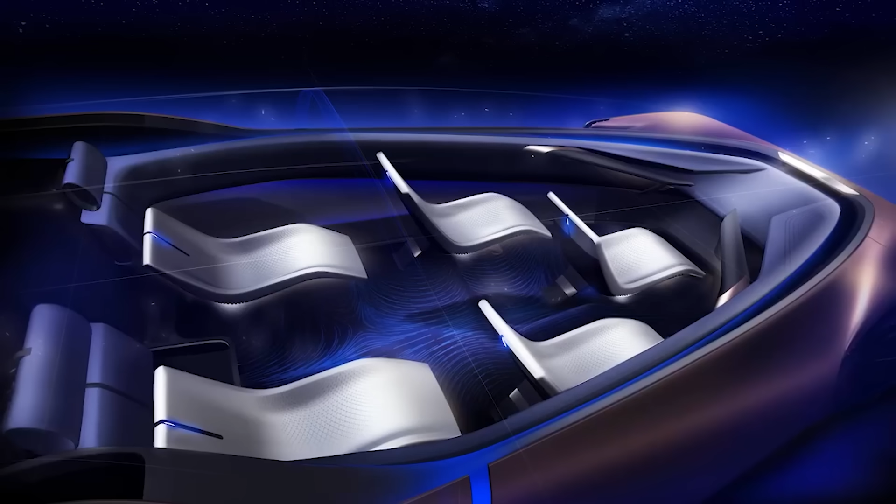Next up is a fully autonomous concept car. The developers are so confident in its self-driving capability that they didn't include a steering wheel at all. Instead, compact joysticks are installed on each side, but they're only needed in case of emergency. The extra space in the cabin has been used for additional seats that recline.

There are no digital displays inside. Instead, the car features projectors with augmented reality technology. Of course, this vehicle, by the Italian studio Pininfarina, is electric and has every chance of becoming the ideal car of the future.

Residents of Texas and North Carolina are in for a treat, as their food can now be delivered to their doorsteps within just 5 minutes, thanks to Flytrex. This marks the first time such a delivery service has been specifically designed for suburban areas. The round-trip journey spans roughly 8 kilometers.

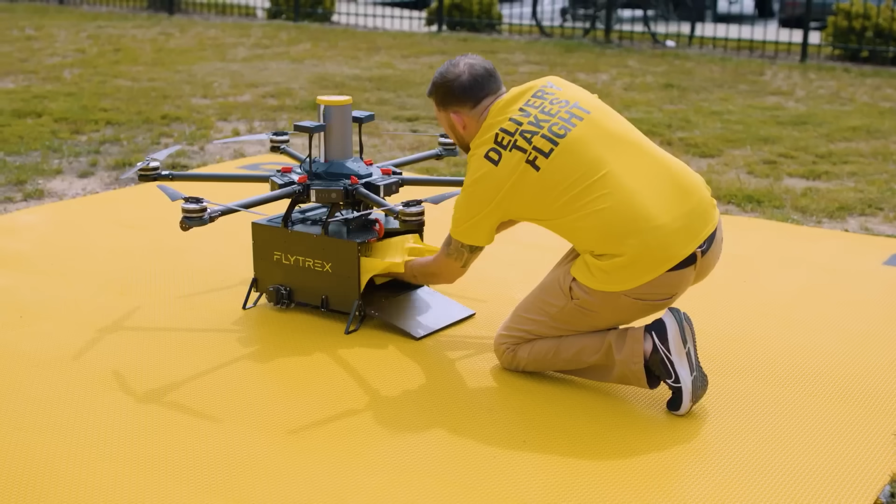These drones can reach speeds of up to 51 kilometers per hour, ensuring your coffee stays hot and your ice cream remains frozen. No pilots are needed, but a team of operators closely monitors the flights as a precaution. Currently, the maximum weight for orders is 2.5 kilograms. If you're not in the mood for lunch, you can also stock up on essentials like toilet paper and more.

Relatively small changes in motorcycle design can significantly enhance comfort and safety. The Rungu Dualie, a motorcycle developed in the United States, features an extra front wheel that improves stability, making it harder to fall off. The developers also extended the wheelbase, which increases cross-handling performance. Compared to competitors, the Rungu Dualie can handle slopes that are twice as steep and easily travel through muddy or snowy terrain.

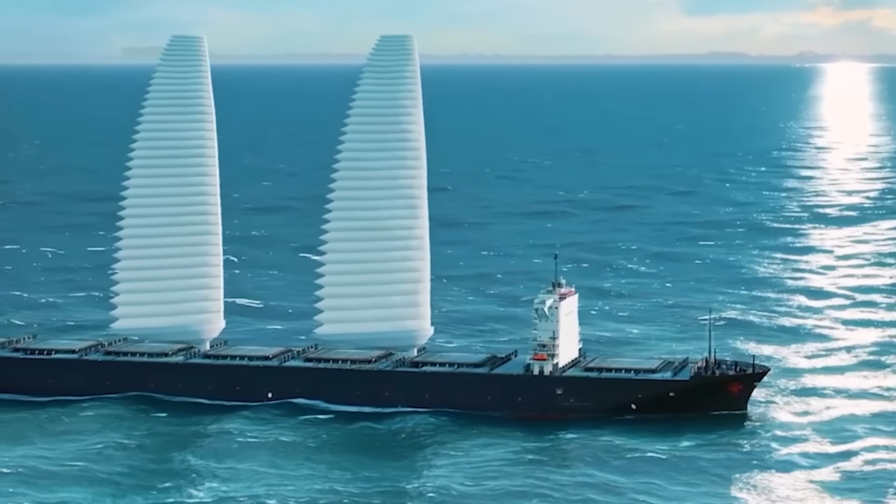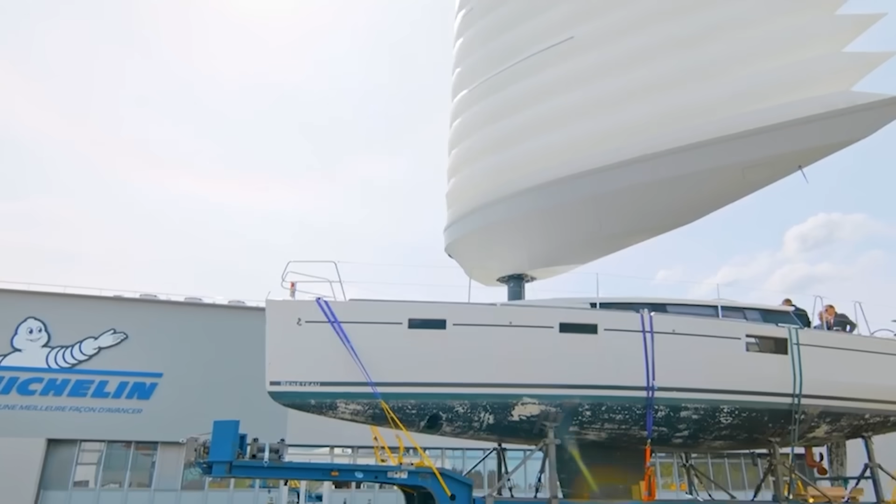The next development will partially address the environmental challenges humanity has been dealing with in recent years. Michelin's WISAMO is an automated telescopic inflatable sail system. It can be fitted to a newly built ship or installed on an older one already in operation. The massive sails move the ship forward using the power of the wind, an unlimited and completely free energy source. This reduces fuel consumption and lowers emissions.

Another major benefit is that, thanks to its specialized design, WISAMO can be used on larger ships that are typically less environmentally friendly. These include different roll-on/roll-off vessels, bulk carriers, and oil tankers.

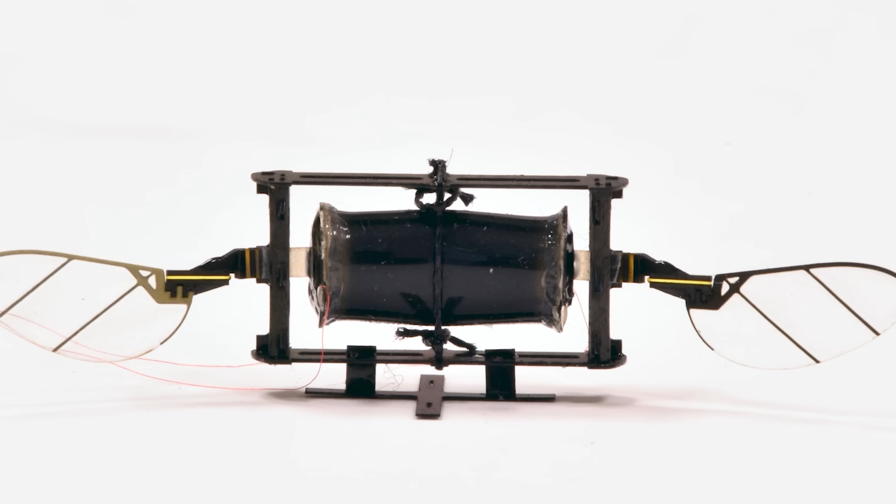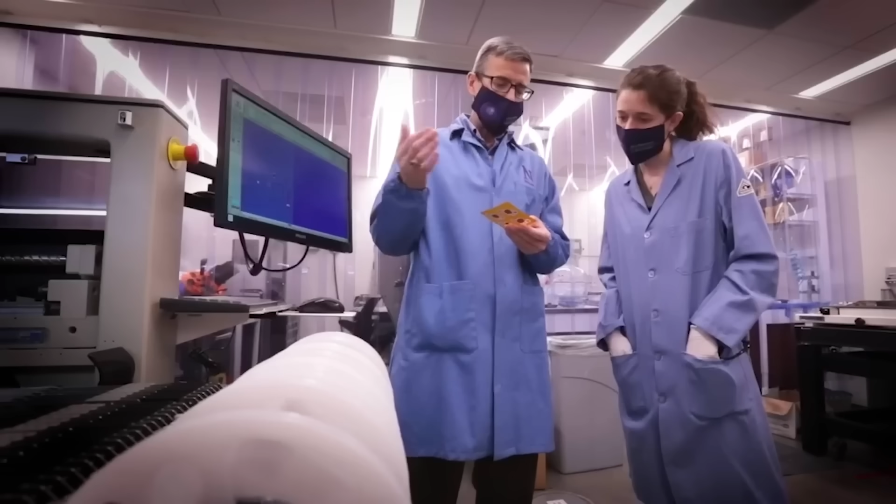Meet the world's tiniest remote-controlled robot. It's incredibly small, resembling a crab that's only the size of a ballpoint pen tip. Measuring under 0.5 millimeters in length, this mini robot can twist, bend, crawl, and even jump. Designed with surgical applications in mind, it can assist in procedures like tumor removal or clearing blocked arteries.

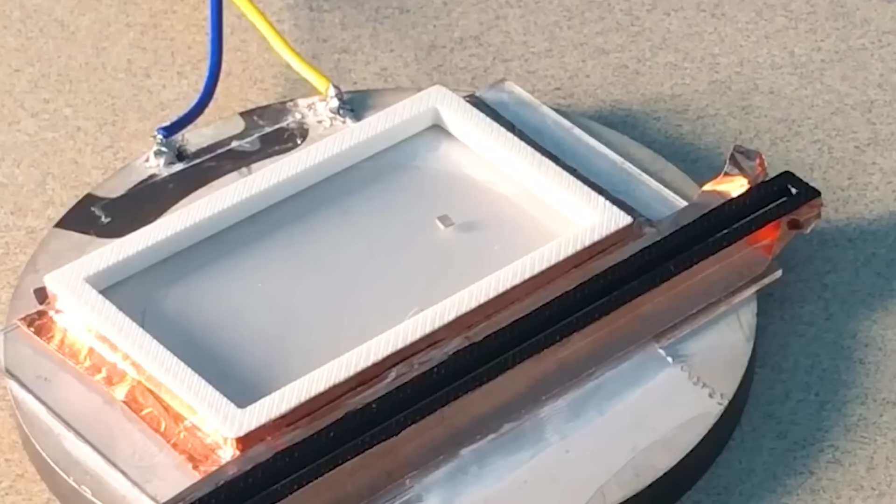These electric insects are made from shape memory alloys and are controlled by lasers. There's also another groundbreaking technology in the miniature robot space: ant-like robots that move via vibrations produced by ultrasound. Their legs are fitted with sensitive bristles that detect sound waves, allowing them to move independently or in groups. Like their crab-shaped counterpart, these ant-inspired robots have significant potential in the field of medicine.

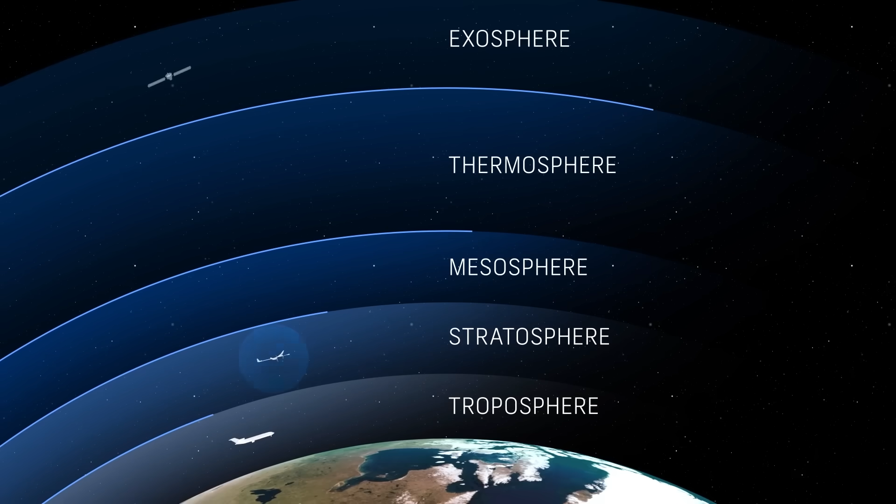In June of last year, experts successfully tested the PHASA-35 at an altitude exceeding 20 kilometers. This drone serves as a cost-effective alternative to satellites and runs on solar energy. It's claimed that the PHASA-35 can stay airborne for a whole year with a payload capacity of 15 kilograms. It can handle various tasks, from setting up 5G networks to monitoring forest fires. Its impressive 35-meter wingspan adds to its capabilities, and it can reach speeds of about 145 kilometers per hour. Keep an eye out for it hitting the market in around 3 years.

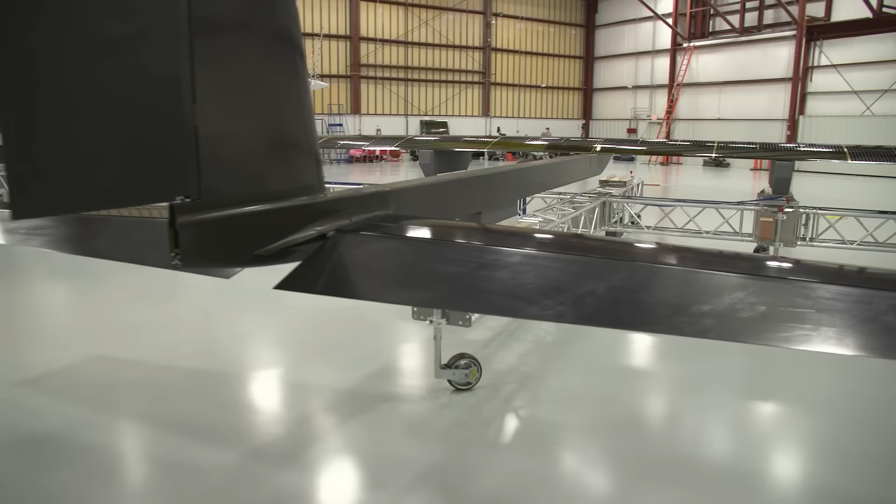HausBots' HB1. All high-rise work comes with risks, but in the future this will no longer be an issue. Several companies are already working on robots that can climb walls. One example is HB1 from the British company HausBots. It is a flat, four-wheeled device with unique patented motion technology.

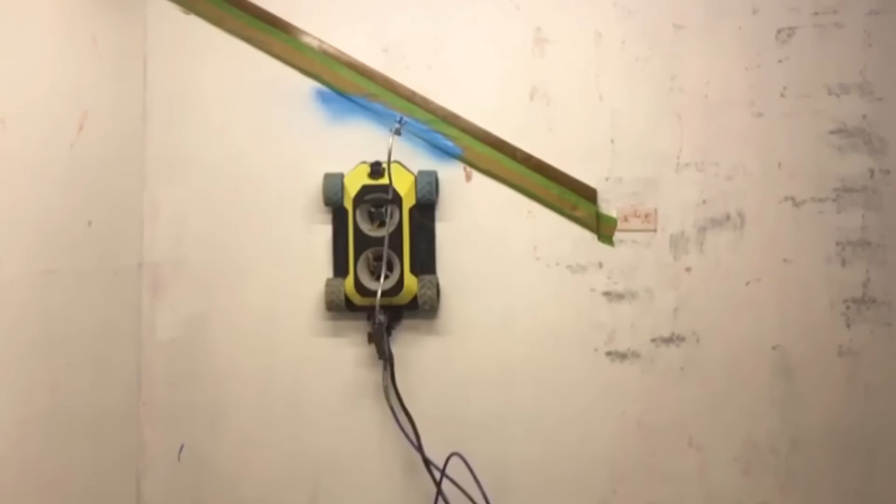It climbs vertical surfaces using air currents that generate 92 pounds of downward force, which is enough to support the robot's weight and an additional 13 pounds of payload. HB1 can even navigate rough surfaces and get past small obstacles like ropes and bolts. The developers anticipate the robot will be used in the future for painting work and visual inspections of buildings and infrastructure.

Have you heard of the Artemis Moon Exploration Program? The goal is to establish a settlement on the moon by 2030, and the technologies developed for Artemis will also play a crucial role in future Mars missions. One standout innovation is LUNARSABER, a structure developed by Honeybee Robotics.

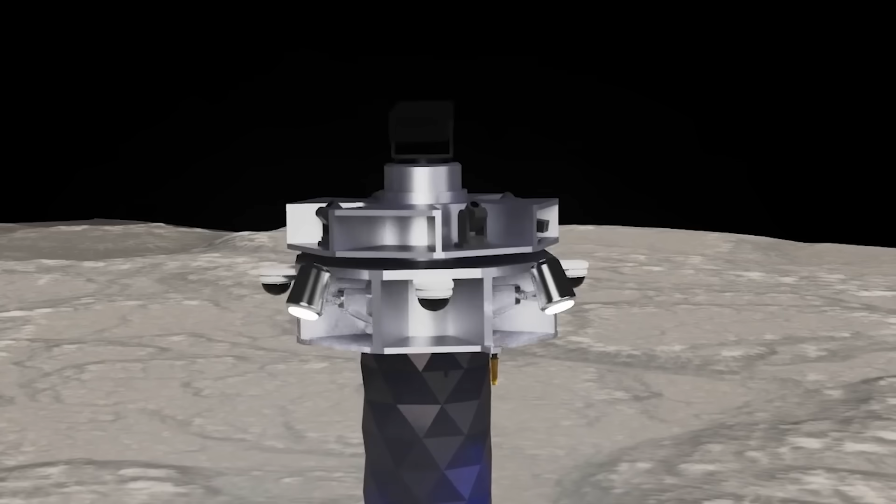LUNARSABER is a 100-meter tall tower capable of supporting up to a ton of weight. It will be outfitted with solar panels capable of generating 100 kilowatts of power. These towers will also feature adapters to recharge lunar rovers and other space equipment, essentially acting as power banks and creating a reliable energy infrastructure on the moon.

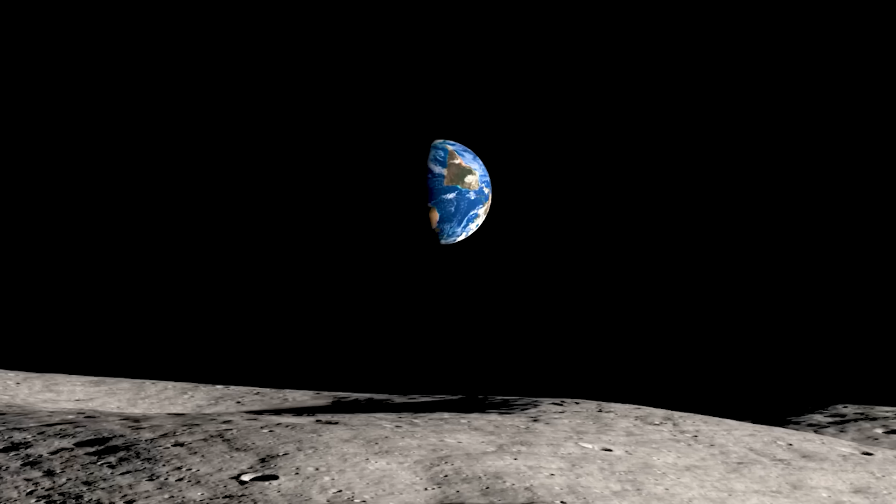With Honeybee Robotics' extensive experience working alongside NASA and the US Department of Defense, we just might see these towers in action soon.

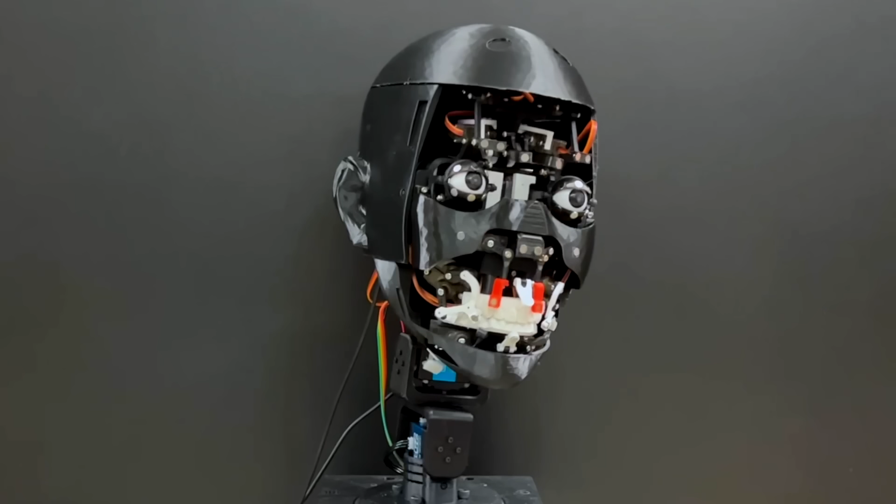In recent years, robotics has made significant progress, particularly with machines designed to interact with humans. A great example is Emo, a robot with a silicone face. Emo can make eye contact and even predict when a person is about to smile up to 840 milliseconds before it happens. While this might seem like a minor detail, it greatly enhances the relationship between humans and robots, fostering an atmosphere of trust.

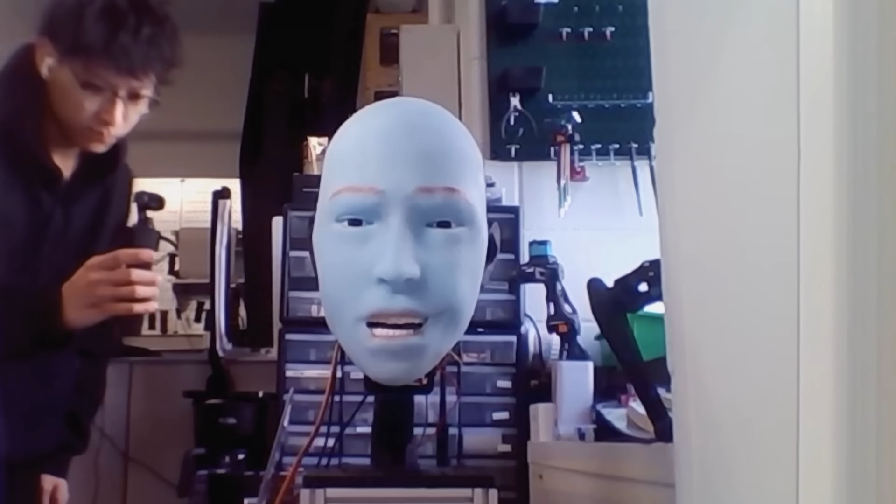Developed at Columbia University, the scientists behind the project faced two significant challenges: creating a mechanically complex and expressive face, and calculating the perfect moment to display emotions. The project was so successful that Emo, the silicone-faced robot, might soon be auditioning for acting roles in Hollywood.

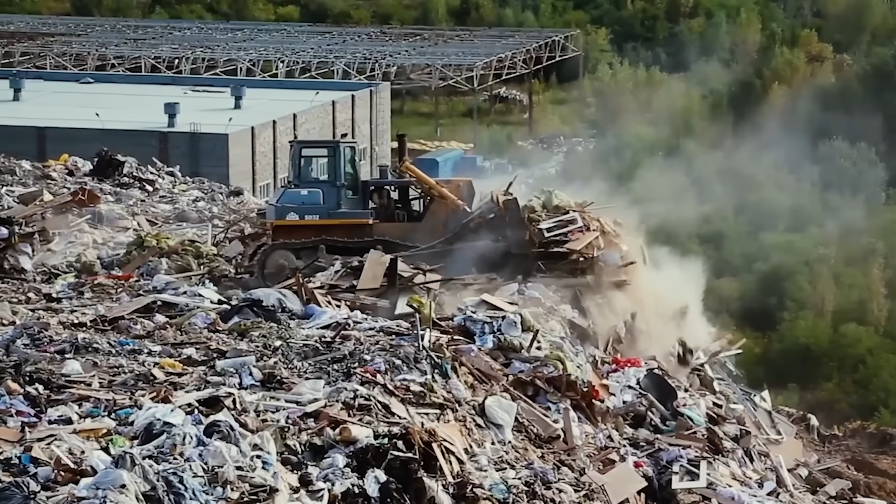Recycling is crucial for slowing the expansion of landfills. With advances in robotics and space exploration, why not have a smart trash bin? That's exactly what the Bin E team has created. Using AI, their smart bin identifies waste with impressive accuracy, misclassifying items only 8% of the time.

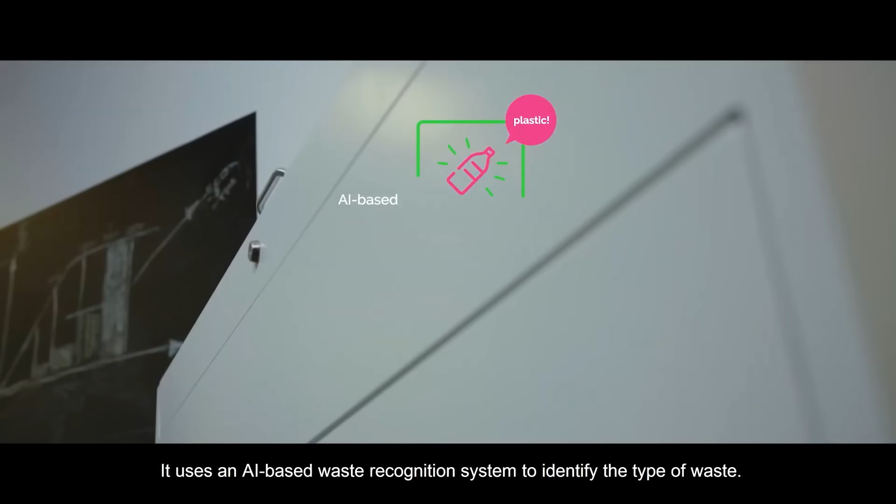It handles everything from plastic and aluminum to batteries, automatically sorting and compressing waste when possible. When the bin is full, it sends notifications to your phone or email, and the data is stored in the cloud, helping garbage trucks plan more fuel-efficient routes.

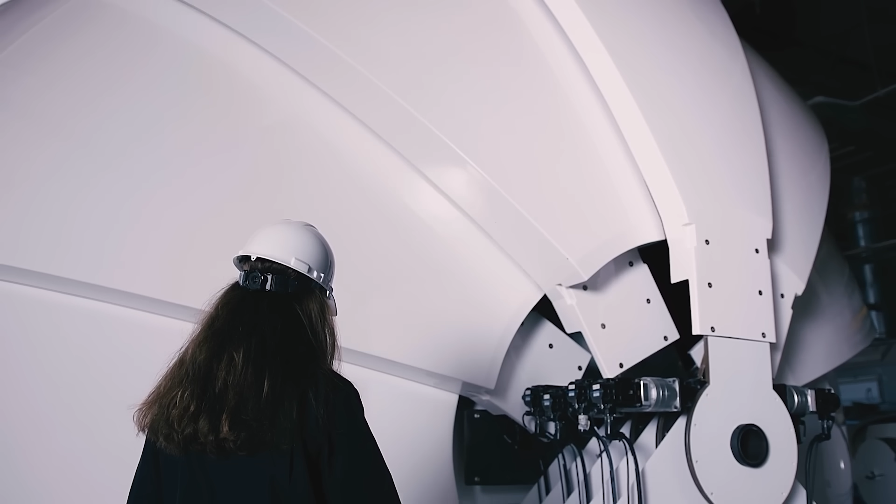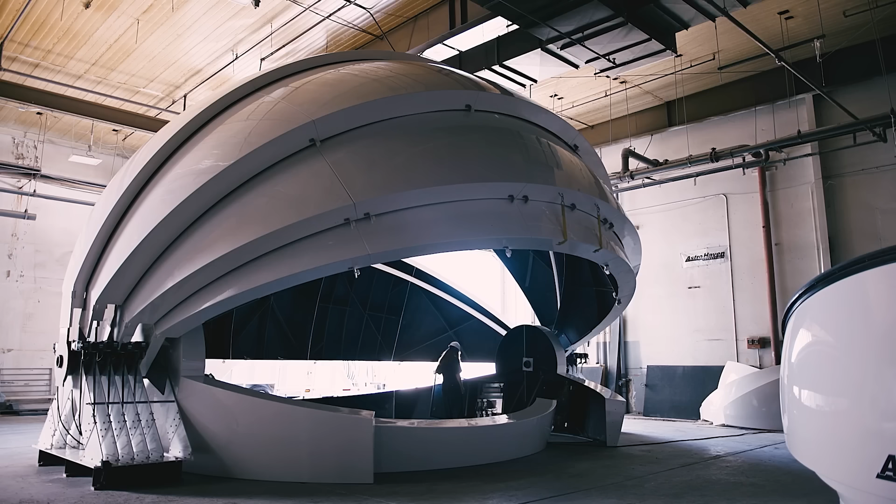In 1995, Grover Brotherston founded Astrohaven, a company focused on astronomical solutions. The 75-year-old entrepreneur had a simple vision: design and sell affordable fiberglass domes for observatories. After experimenting with a couple of rotating models, he hit on the idea of a static, clamshell-shaped structure, and it was an instant hit. Brotherston's creation became so popular that the product range expanded to include a massive 6-meter-tall model.

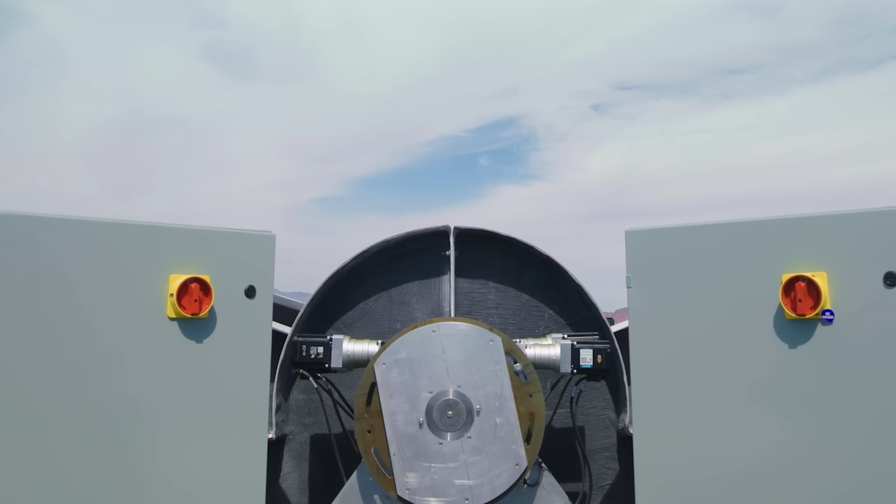It wasn't just amateur astronomers buying from Astrohaven. Defense companies also began showing interest. Today, the domes continue to evolve, integrating aerospace engineering solutions while staying true to the company's philosophy: focus on astronomy or science rather than worrying about maintaining observatories.

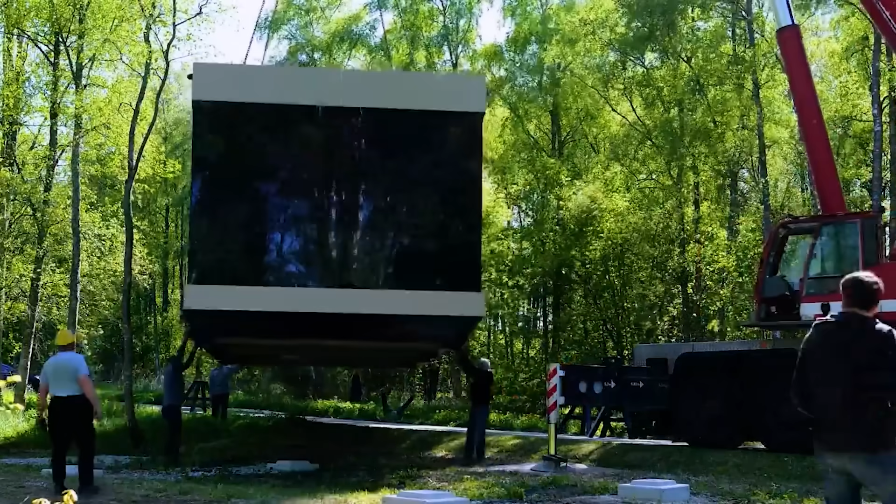The Space I/O House has reimagined the concept of modern self-sufficient homes, all thanks to the Space Project. A dwelling that offers its owner a high level of comfort while also being extremely mobile. The designers propose transporting the structure from place to place like a trailer, quickly, easily, and without effort. It can be placed almost anywhere, even in remote locations, because all the necessary systems are already built inside.

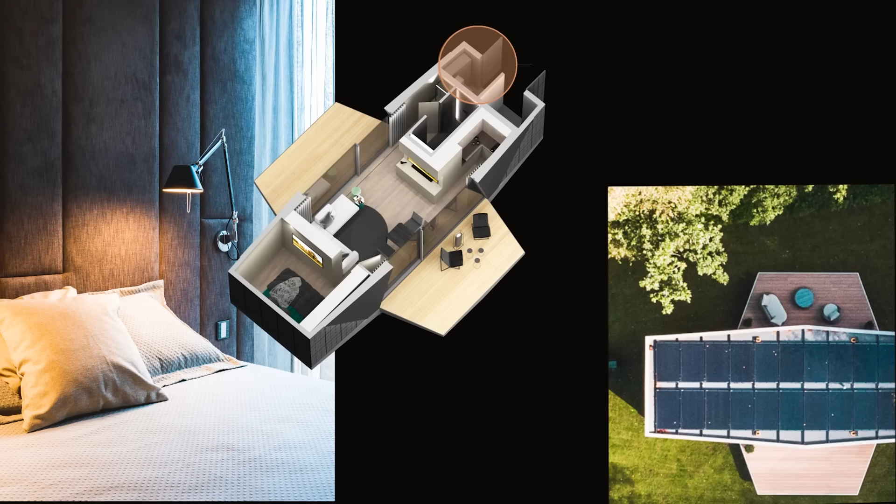The base has electricity, heating, water, sewage, and Wi-Fi. The house is built from high-quality, eco-friendly materials and is environmentally sustainable.

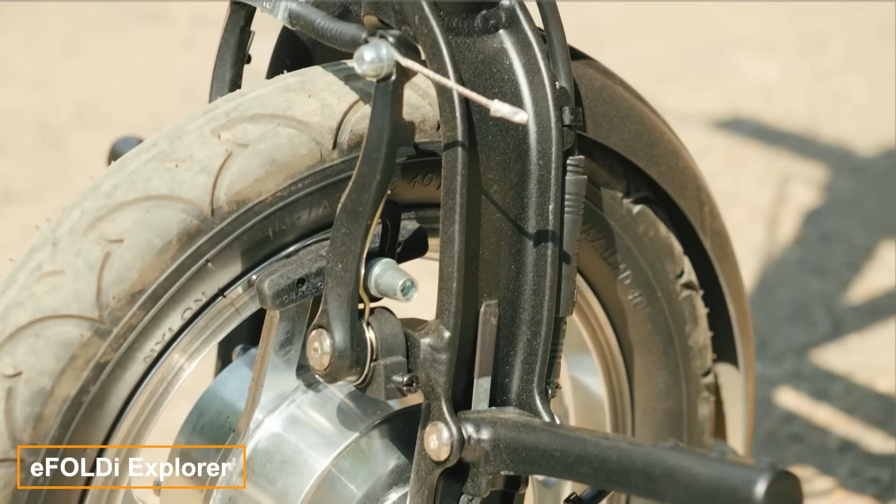The eFOLDi Explorer scooter is now available for those willing to spend $3,520. With a foldable and lightweight design, just 17 kilograms without the battery, it offers convenience that sets it apart from other electric vehicles. It's easy to carry on public transport, store in a car trunk, and even doubles as a chair. Though not the fastest vehicle, with a top speed of 13 kilometers per hour, it has a 23-kilometer range on a full charge.

According to the manufacturer, this range should provide a new sense of freedom for users. Plus, pneumatic tires and 4-point seat suspension ensure a smooth, comfortable ride.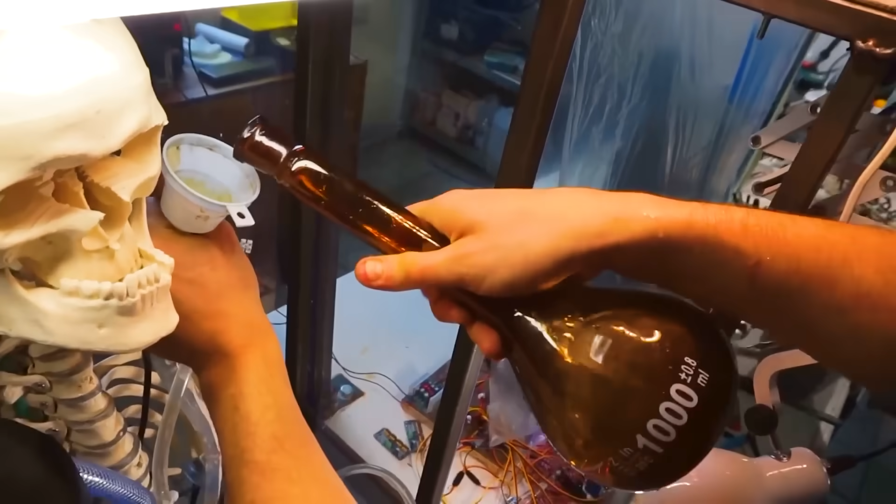A special hydraulic system made up of airtight tubes is responsible for how the artificial muscles work. The controlled movement of fluids inside makes the hand contract and relax, causing motion.

A few months ago, the inventors showed that even though it weighs 2.2 pounds, the robotic arm can lift 15.6-pound dumbbells. However, engineers still need to improve the arms by adding muscles and eliminating movement restrictions for the wrist and fingers.

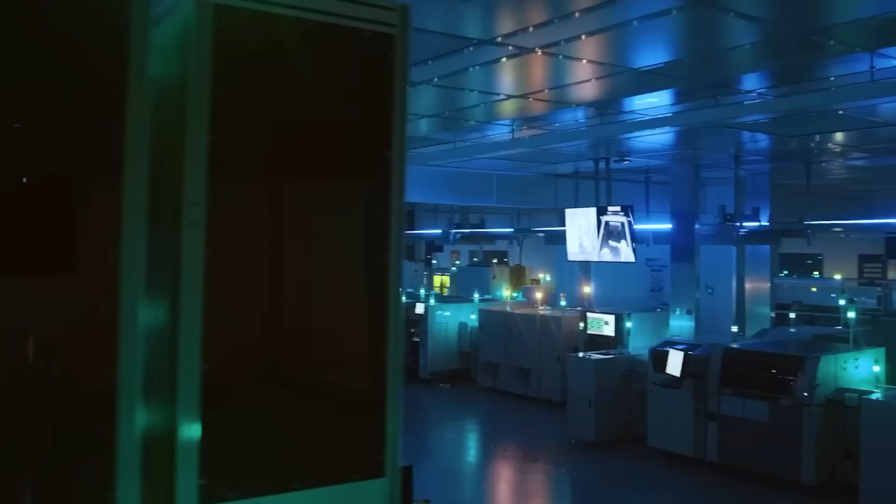Xiaomi has ambitious plans with its smart factory. The Chinese tech giant aims to revolutionize high-tech manufacturing by automating the entire process.

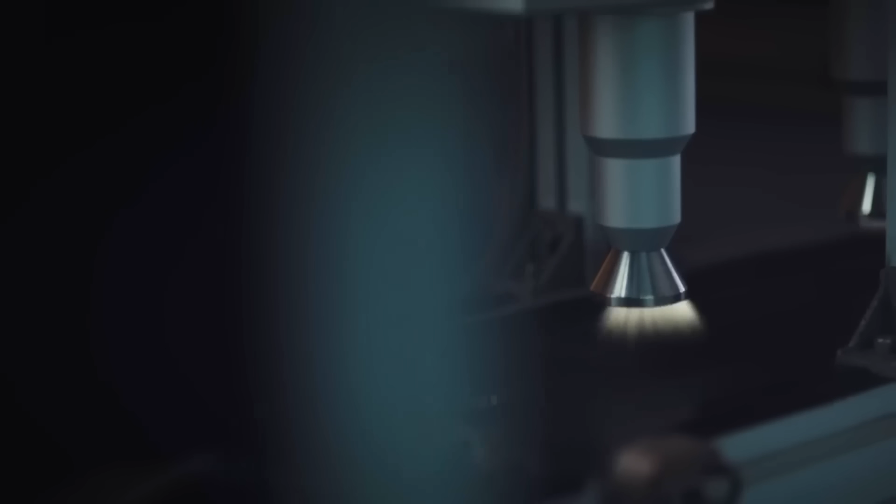They've already opened two factories where robots assemble cell phones without human assistance. The Changping Smart Factory boasts the capacity to produce over 10 million devices annually, a huge leap compared to the previous facility's output of just 1 million.

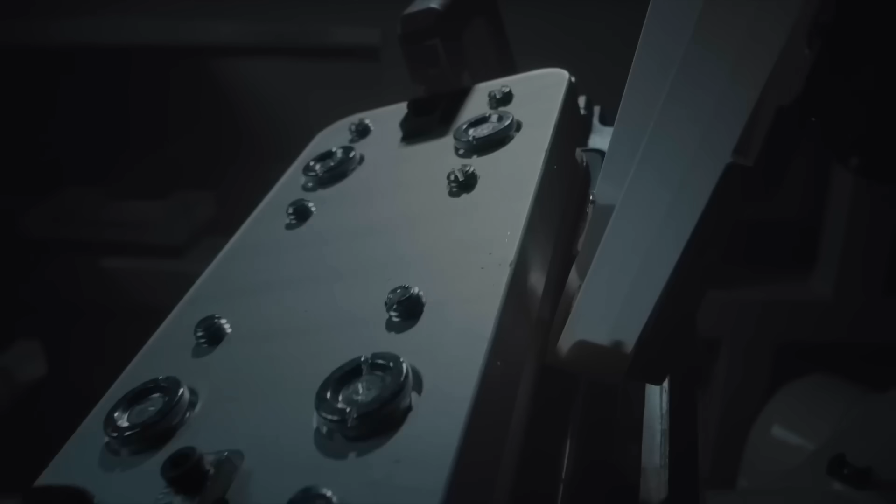Notably, all the equipment inside the factory is also made by Xiaomi. The robots there build Xiaomi's 14, 14 Pro, and 14 Ultra flagship models, with testing areas also fully automated.

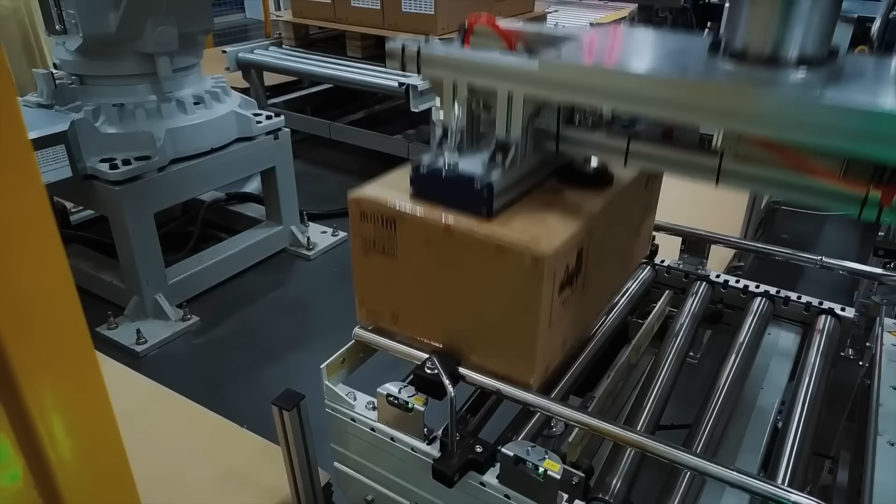It's clear Xiaomi is pushing the boundaries, and it'll be interesting to see how competitors like Samsung, Apple, and Huawei respond.

In 2018, this drone set the record for the longest uninterrupted flight, staying in the air for an incredible 25 days, 23 hours, and 57 minutes.

This was made possible by its unique design. First, the vehicle's entire upper surface is covered with solar panels that generate energy to power the systems. Second, the Zephyr S flies in the stratosphere at an altitude of 13 miles, meaning it isn't affected by weather conditions.

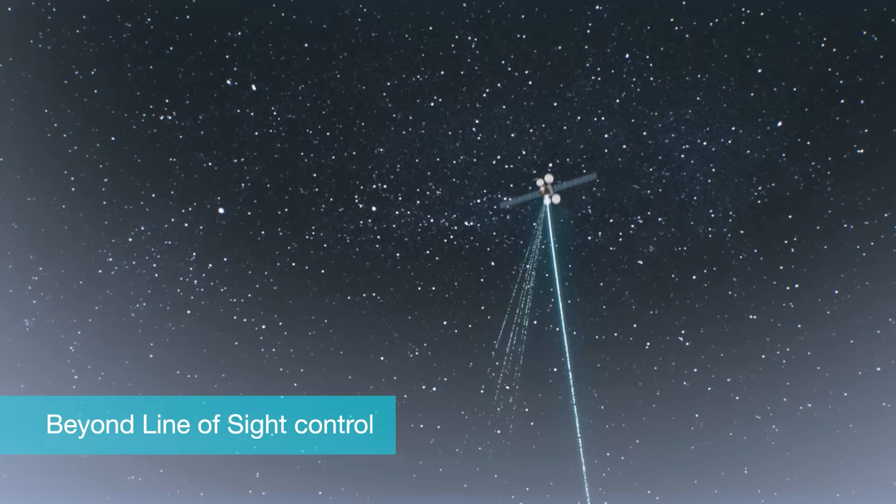Zephyr S has a wingspan of 82 feet, a weight of 165 pounds, and can carry 5 times its own weight. It is perfect for reconnaissance, surveillance, and as a cost-effective alternative to communication satellites.

The United Kingdom has already placed an order for several of these drones for military use.

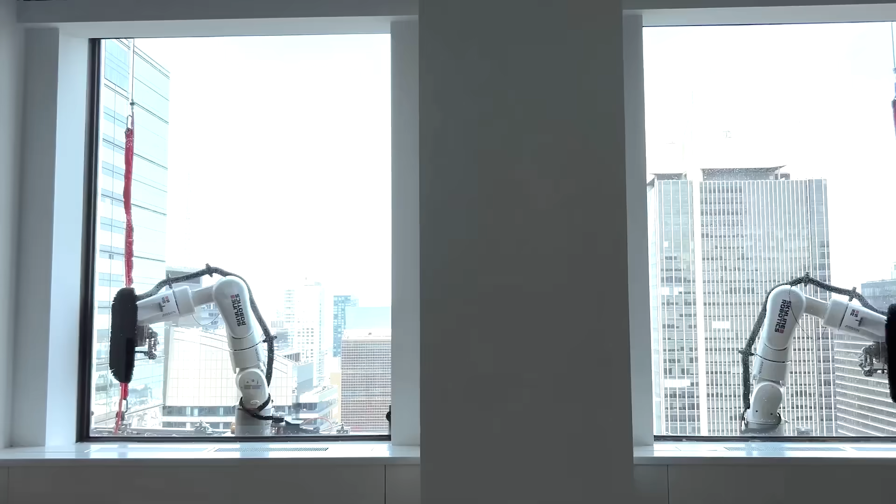In 2010, there were only 52 skyscrapers worldwide, but by 2020, that number had risen to 198. Maintaining these towering giants presents unique challenges. Even cleaning windows at such heights becomes a daunting task.

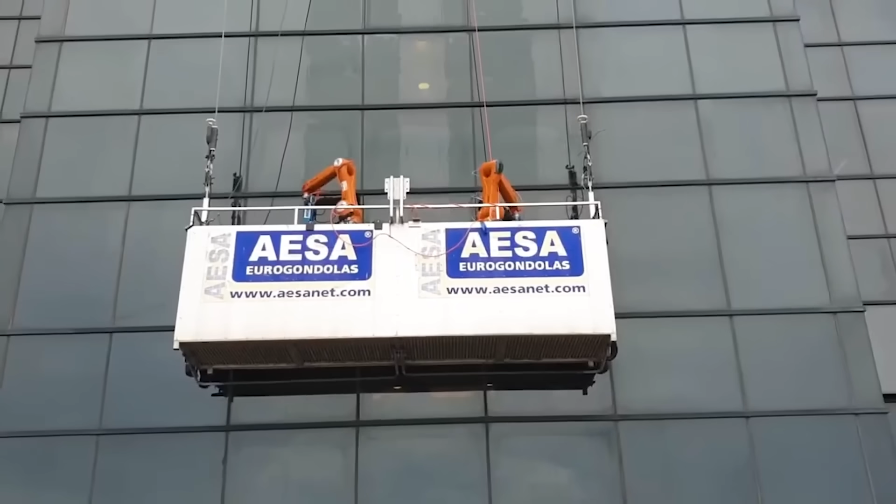Luckily, the Ozmo robotic system is up to the challenge. Ozmo's agile robotic arms clean windows 3 times faster than humans while applying just the right amount of pressure, thanks to integrated sensors. It's also weather-resistant.

Wind gusts are no issue, as Ozmo recalculates its cleaning path hundreds of times per second, always selecting the optimal route.

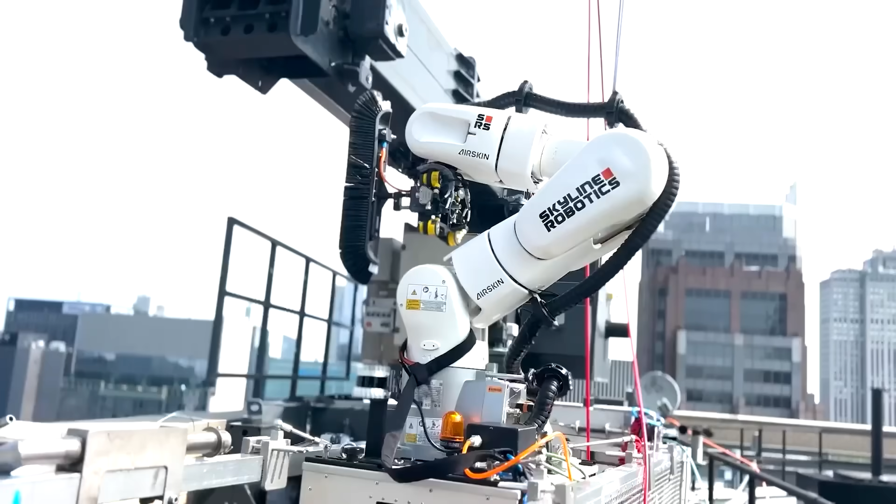Motorcyclists are among the most vulnerable road users and face the greatest risk when taking sharp turns. The Swiss company Aegis Rider AG has created a solution to this issue and already has a fully working prototype.

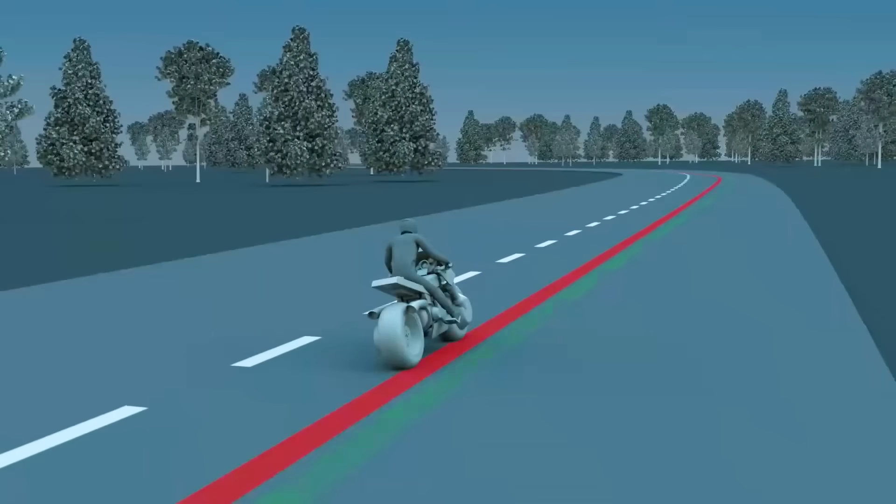The safety system includes a set of sensors, a camera, a satellite navigator, an IMU, and a computer. It assesses the road conditions and then informs the rider how to take the turn in the safest way. The motorcyclist gets this information through augmented reality.

The system projects the best path to take directly onto the road ahead of them. Furthermore, if the rider makes a mistake, it tells them how much they need to adjust their speed and the bike's angle.

Let's go to Texas and check out ISEE's accomplishment. Thanks to their efforts, this distribution center, spanning around 160,000 square meters, has become the world's first with a fleet of entirely autonomous trucks.

These trucks efficiently handle 750 trailer sites, employing artificial intelligence algorithms to drive in a manner that cuts costs and enhances safety.

Note that the transportation and warehousing sector tops the list for employee injuries, according to the U.S. National Safety Council. Given the expected shortage of 160,000 truck drivers in the States by the decade's end, ISEE's solution proves to be a crucial investment.

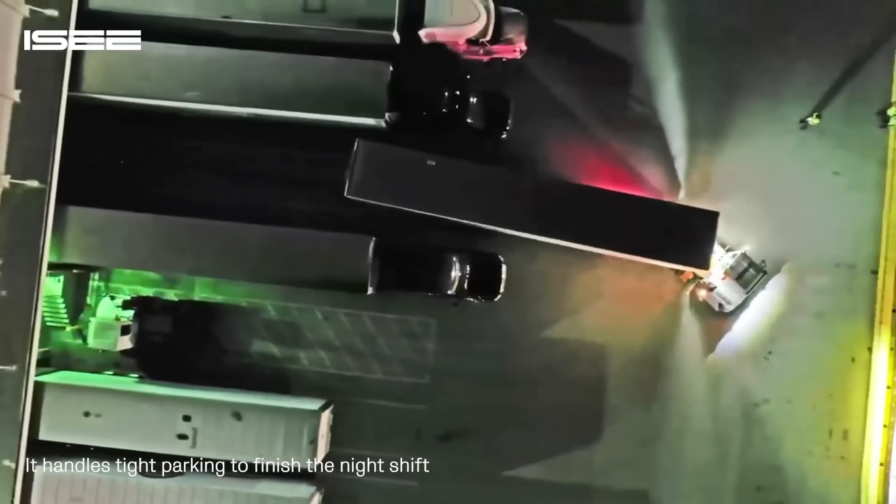This is the first personal yacht powered entirely by renewable energy sources. Its propulsion system is hybrid.

Solar panels on the roof generate part of the energy, while the rest comes from hydrogen fuel cells that don't even need to be refueled. Green hydrogen is produced right on board through electrolysis, using solar energy and salt water.

As a result, Aquon 1 essentially has an unlimited range and can stay at sea indefinitely. The yacht's interior is designed to match the luxury of a high-end hotel, ensuring you won't want to return to dry land.

The creators of the iFeel suit believe it represents the next big step in continuous health monitoring. They're working on two primary applications.

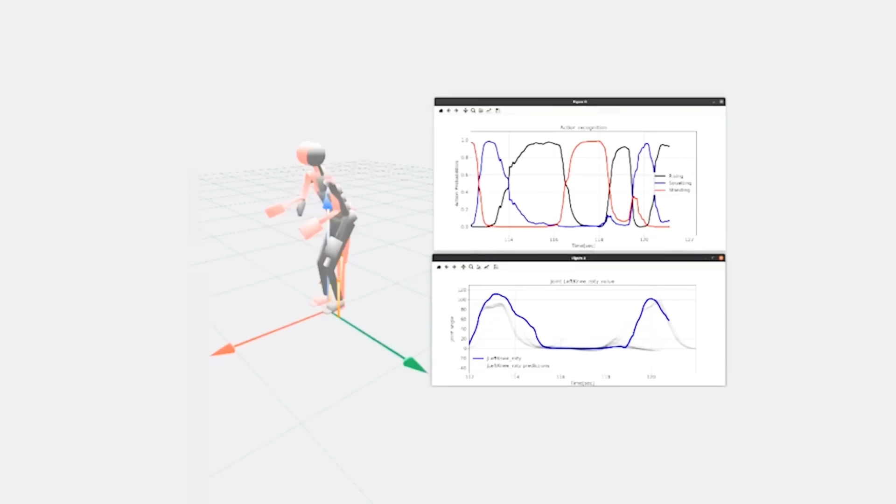First, the suit is geared toward rehabilitation. Equipped with various sensors, including biometric ones, it gathers critical data for physicians, for instance. It can predict fatigue levels.

Second, the suit plays an important role in prevention. It tracks posture and delivers tactile feedback if the user isn't standing or sitting properly.

Additionally, the iFeel suit can control the humanoid robot iCub 3. Who knows what other possibilities the developers will unlock?

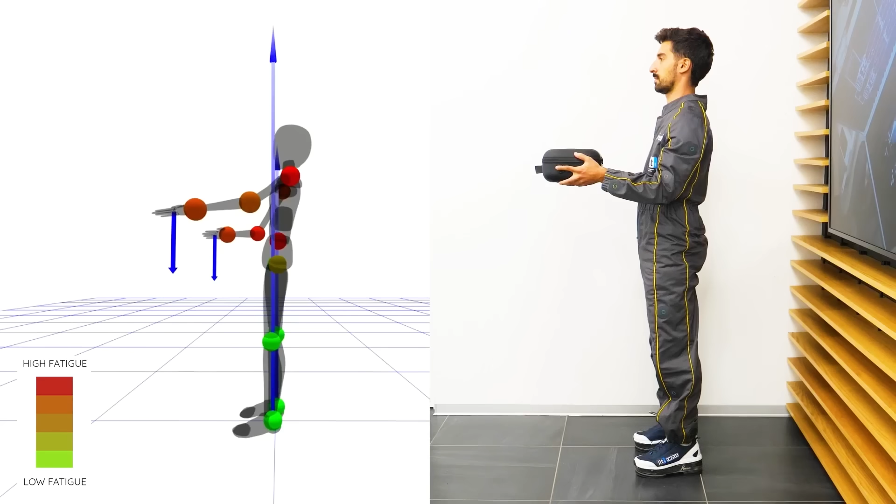The US-based company Quell Tech has developed a technology that will revolutionize boxing training, turning the exhausting process into a fun game that boosts the athlete's efficiency and performance, all without leaving the house.

The system includes a game played on a screen, controllers, and a special console worn on the body. The game mode makes you feel as if you were in a real fight, while the console adds resistance, forcing the user to exert more effort.

Another advantage is that during training, the system tracks key indicators such as speed, strike accuracy, and frequency, allowing for better analysis and progress tracking. Quell can be yours for $250.

In 2021, the South African startup Fractal introduced a prototype of a flying vehicle designed to mimic the appearance of a bat. Experts hope that this vehicle will help solve Africa's severe transportation challenges in the future.

Macrobat runs on a 100% environmentally friendly propulsion system and is capable of vertical takeoff and landing. It's too early to discuss precise specifications as no test flight has been scheduled yet.

However, the planned Macrobat will have a range of 93 miles and reach speeds of up to 111 miles per hour.

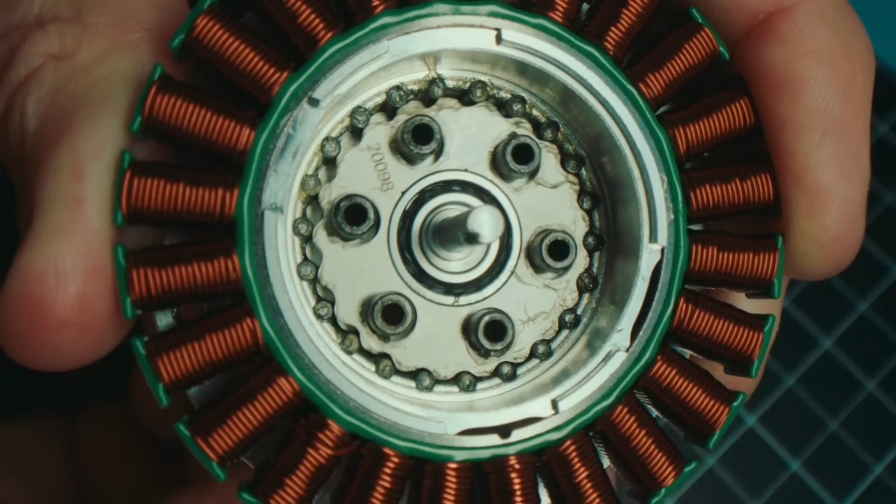Crafted from ultra-light carbon fiber, the motor transfers energy to the leg through an adjustable cuff, ensuring a perfect fit for anyone. Mogo pants reduce strain on the thighs and hamstrings, activating when support is needed and deactivating when it's not. With a battery life of over 3 hours, they provide confidence for long hikes, and the simple interface makes adjusting the power a breeze.

Soon, experienced climbers will be marveling at Grandma's confident stride.

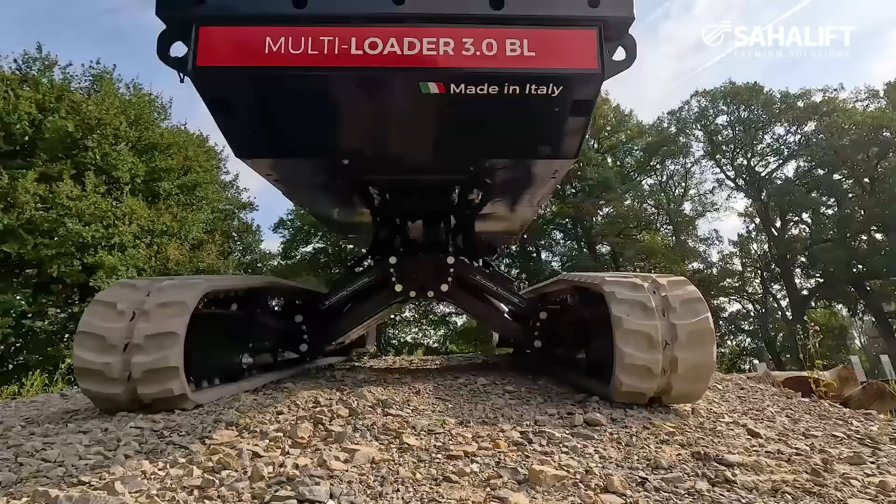Introducing the Multi-Loader 3.0 BL, a tracked carrier designed for moving loads where larger machines are impractical and wheeled vehicles just won't do. This carrier is capable of transporting up to 3 tons of cargo with ease. Although it's not the fastest at 2 kilometers per hour, the Multi-Loader 3.0 BL offers the convenience of remote control operation.

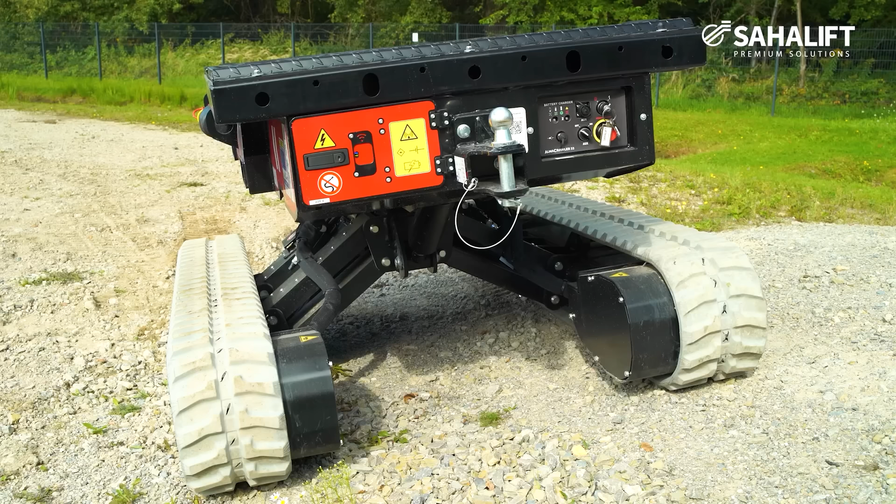Its ability to automatically level loads proves especially useful on slopes up to 20 degrees. Compact, with dimensions of 2.4 by 1.6 meters, it's ideal for maneuvering through forests or tight warehouse spaces. Powered by 2.5 to 3 kilowatt electric motors, it's also eco-friendly.

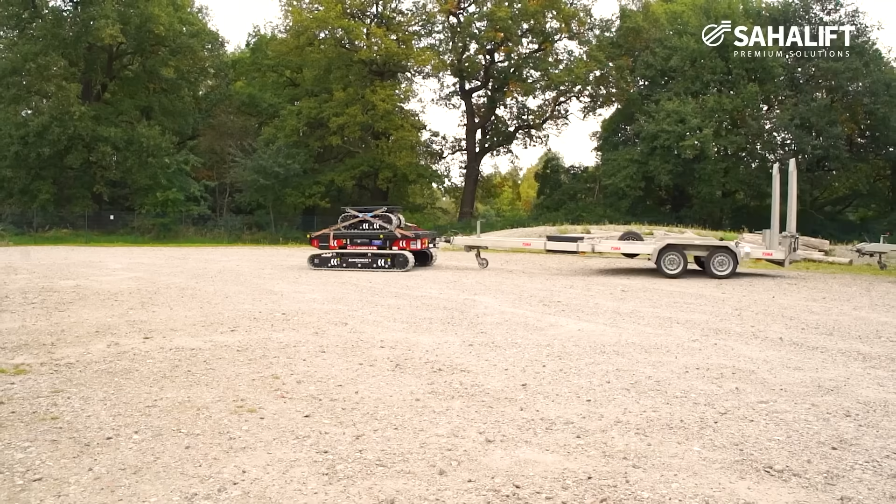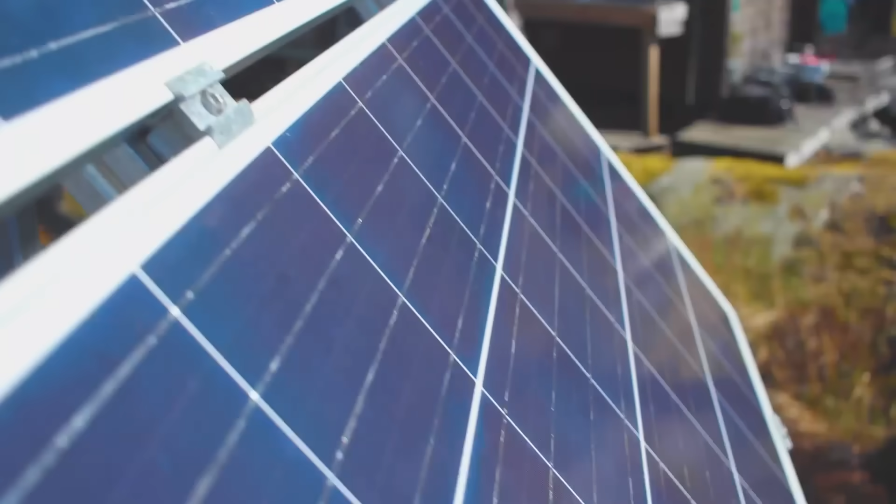Solar energy is becoming a vital source for drinking water, particularly in areas where fresh water is scarce. Solar Water Solutions is designed for these regions, operating almost entirely off the grid by generating its own electricity. Setting up solar panels on a beach is all it takes.

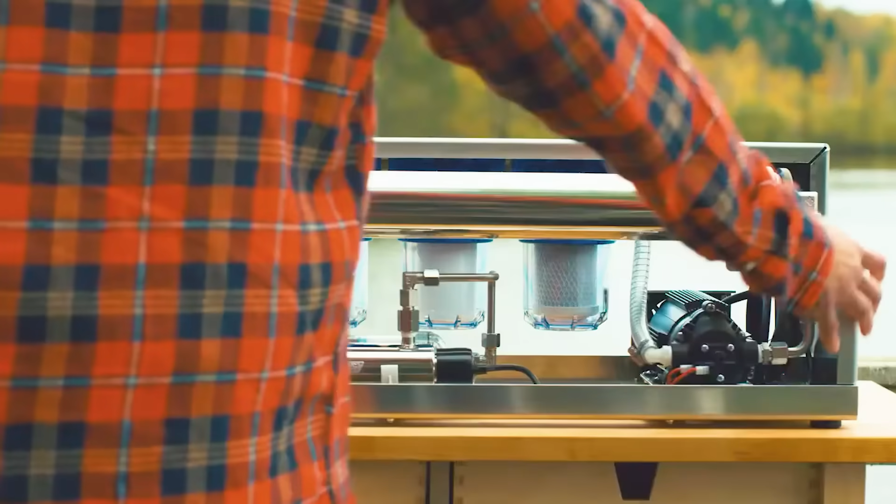The compact desalination units fit into a single container and require minimal space. The creators of Solar Water Solutions are proud of their impact, having helped a hospital in southern Madagascar and farms in Antigua and Barbuda. After all, what better power source is there than the sun?

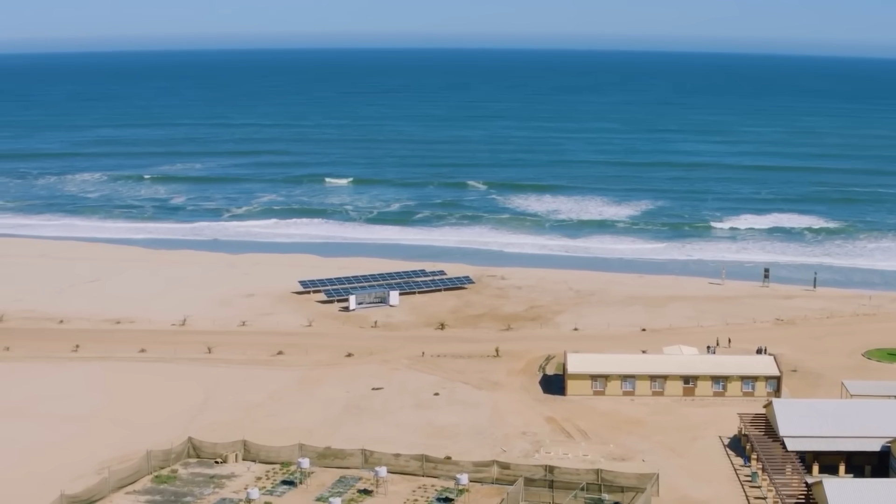The StreamExo exoskeleton was created to support railroad workers. It weighs only 7 kilograms and can operate for about 6 hours on a single charge. But how does StreamExo perform in practice?

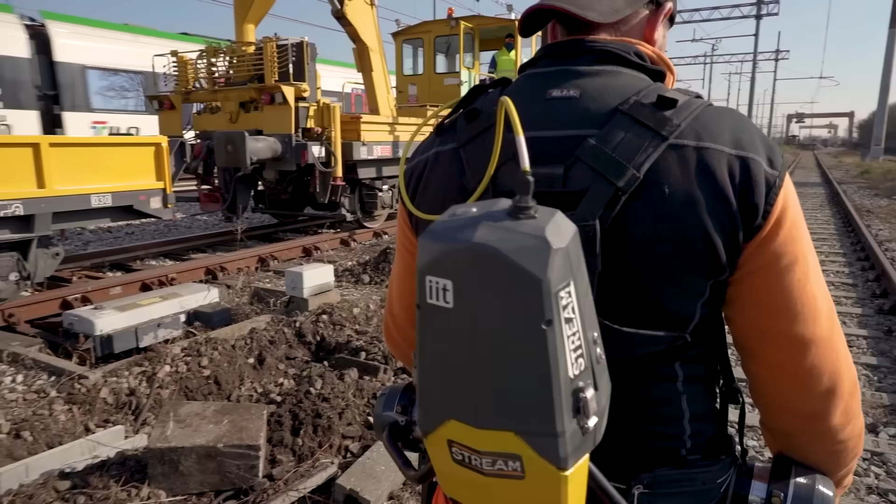Prototypes were tested at real railroad construction sites across Italy. Workers equipped with StreamExo managed to carry 30-kilogram concrete blocks with ease. The results? Impressive. StreamExo reduced the risk of overexertion and musculoskeletal injuries by 50%, while also lowering muscle fatigue by 15% to 30%. Thanks to its compact design, it doesn't restrict movement.

It all sounds promising now. Let's see if big businesses take notice.

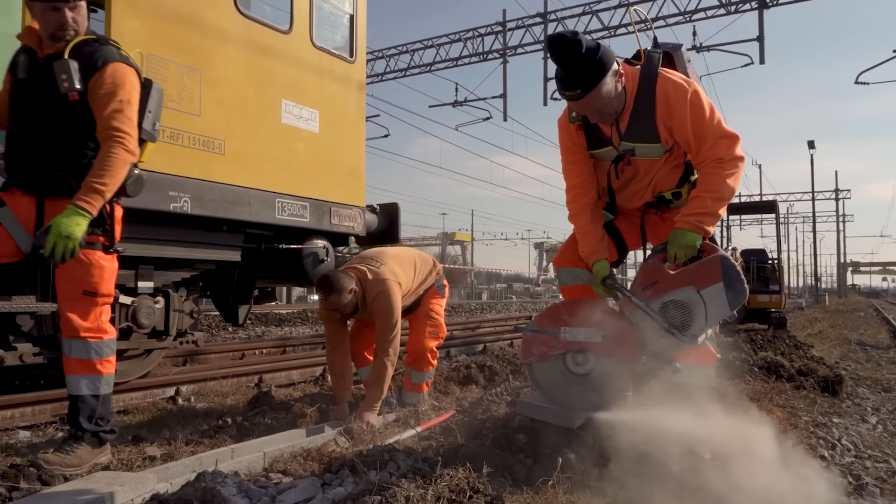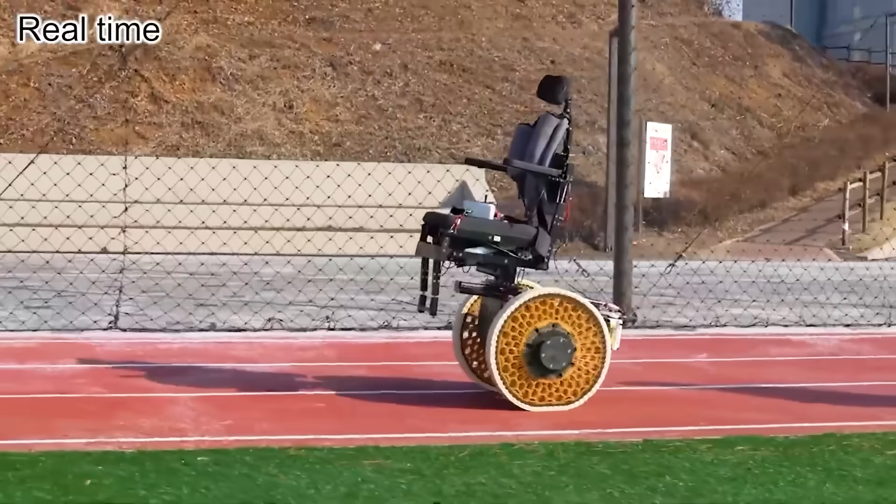The concept for the morphing wheel was inspired by liquid droplets, with the design team agreeing that its flexible structure was ideal. They began work on bringing it to life.

At its core, the wheel consists of an elastic honeycomb connected by wire spokes to a central hub. The length of these spokes varies, causing the honeycomb to either stretch or compress. On flat surfaces, the wheel takes on a round shape, while off-road, it adapts to match the contours of obstacles.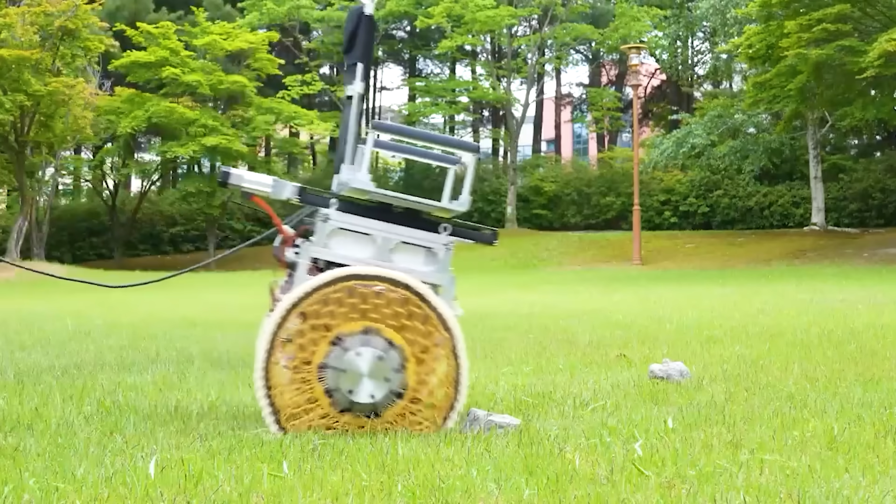During tests with a wheelchair equipped with these morphing wheels, the chair was able to surmount obstacles nearly 1.3 times the wheel's radius. The wheelchair, weighing 120 kilograms, moved easily over uneven, grassy terrain. It likely won't be long before this innovative technology makes its way into SUVs.

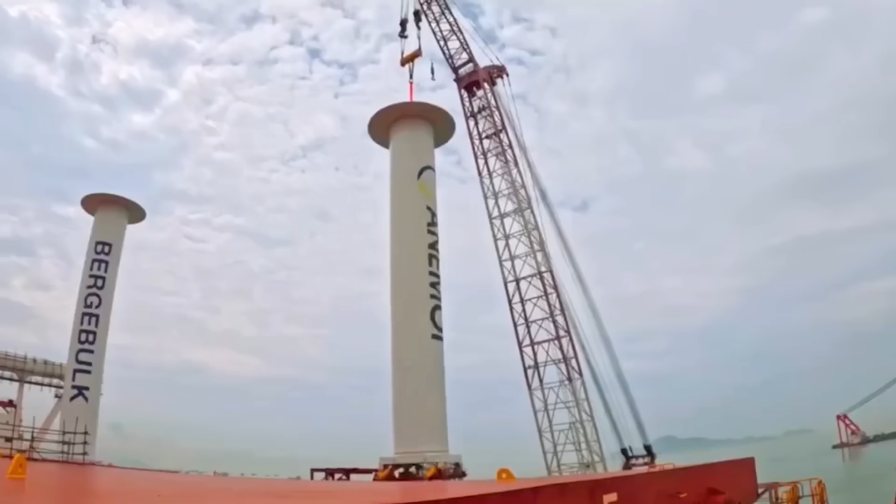Yes, we're talking about hoisting sails, those towering structures resembling giant pillars. Singaporean shipping giant Berge Bulk, one of the world's top dry cargo fleet owners, has already fitted these sails on several of its vessels. Let's dive into what makes these unusual sails effective and why they're useful, even on ships with a dead weight exceeding 210,000 tons.

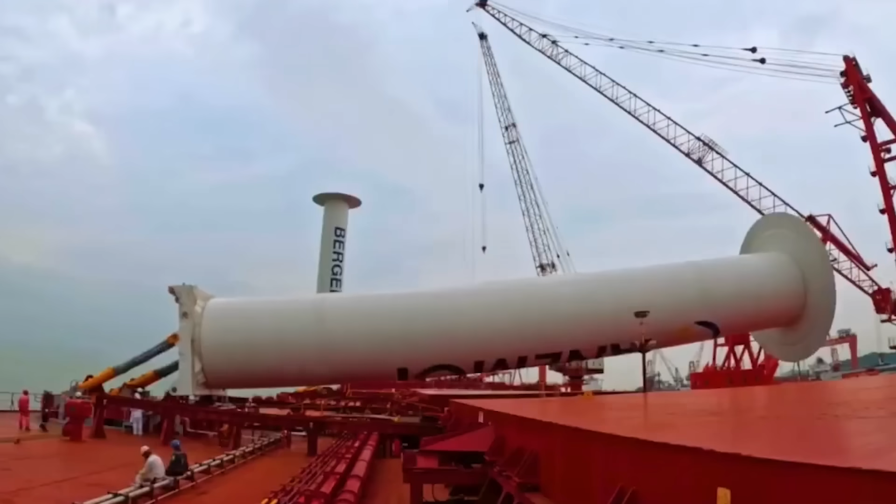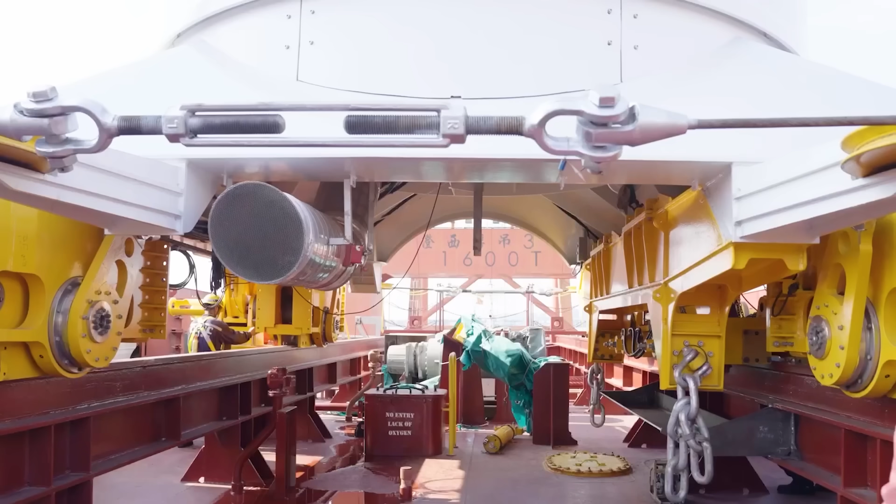Here's how they operate. The sails rotate with the help of the ship's engine. When the wind strikes them, it creates a pressure difference that generates thrust. This thrust can make a huge impact. Four sails can save a typical tanker up to 1,500 tons of fuel annually in favorable weather. What's remarkable is that the output power can exceed the input power by as much as 10 times.

In 2022, the average person on Earth consumed 25 kilograms of fish, more than double the amount consumed 60 years ago. With rising demand, can producers keep up? The answer lies in innovations like the Velella project from Hawaii.

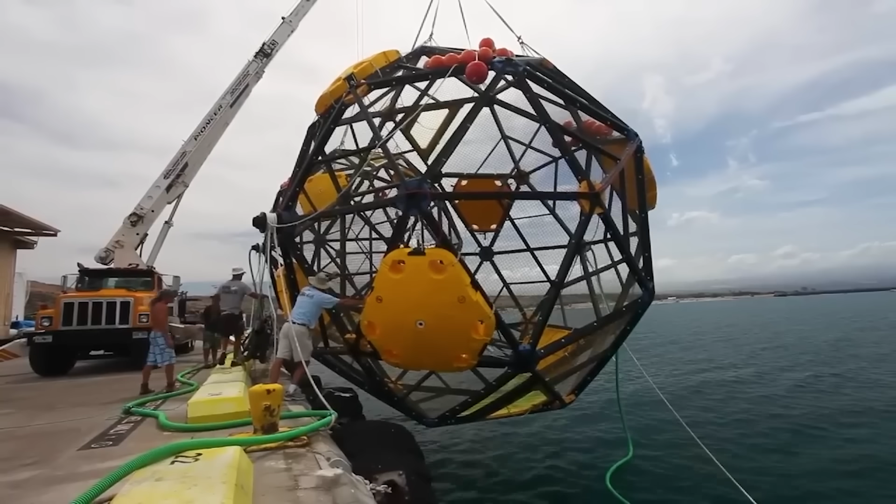The project involves farming fish in large aquapod spheres, durable structures up to 28 meters in diameter, made of reinforced plastic and steel wire. These spheres protect young fish from predators and reduce the spread of disease. Cobia, a fish rich in omega-3, thrives in these environments with tens of thousands of specimens already raised successfully. Thanks, Velella, for the fish.